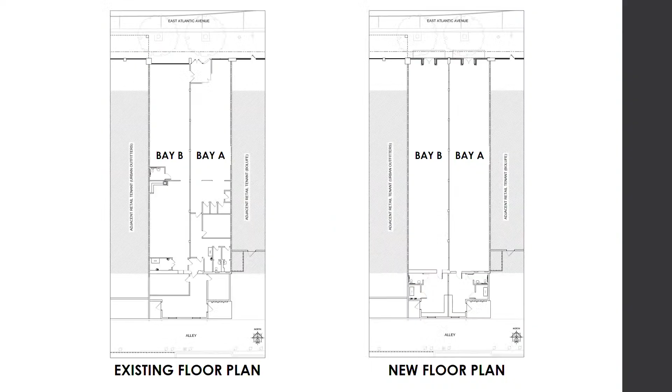On the right is our plan, which shows the new glazing that is approximately 10 foot tall to reflect a transom glass design. It's pretty much glazed all the way across. The entries are recessed, which is something we worked through with the commission and the zoning department, and we're very pleased with the way that it's turning out. We see it as a transitional type design between the two different architectural styles on either side. We think the Bolife building is more significant, so we've backed our awnings off of it and made them rather inconspicuous compared to what's there now.

And we have used some masonry on our sign band but in a much different color to tie that together. These are our finishes that we have. I would say they're understated. There's a section on the left which shows the scale of the building and the recess of the entry, and the setbacks of it.

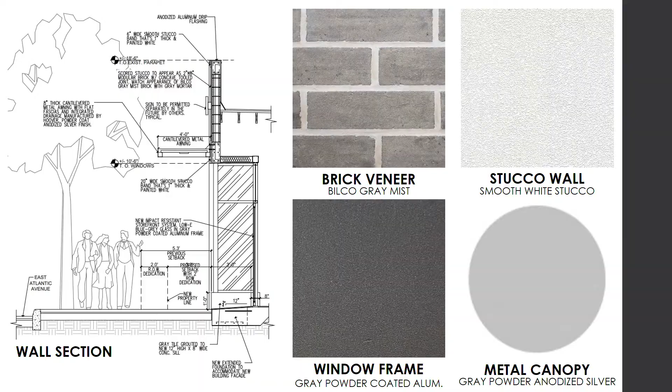And this is our rendering. It shows the completed structure there. You helping me, Susie? There we go. Thank you. So we think that it does reflect a good balance between the historic structure to our east and the contemporary structure to our west, giving nice sign locations to potential tenants there, which will be attractive to good stores. That's about it. It's fairly simple. We think it's a clean design, and we hope that you like it. If you have any questions, just let me know.

Just to note, the waiver was reviewed prior to ordinance number 3123, so the site plan will be reviewed with the regulations set forth in the new ordinance. These changes pertain solely to the processing procedures and do not alter the criteria of the approval.

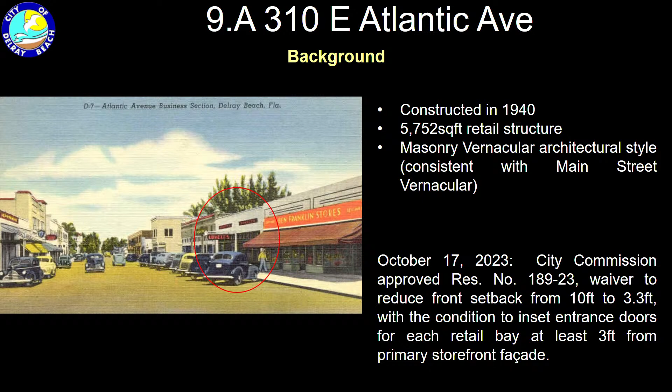On October 17th, 2023, the City Commission approved resolution number 189-23, a waiver to reduce the front setback from 10 feet to 3.3 feet, with the condition that the entrance doors were inset for each retail bay at least 3 feet from the primary storefront facade.

The request includes aligning the building facade with neighboring structures, and each bay is provided with individual doors that are inset the 3 feet.

It also includes new storefront glass, 1 foot tall gray tiles as the storefront base, smooth white stucco along the edge in the center, scored gray stucco to resemble brick for the parapet, and the parapet is lowered to its previous historic height.

It's also replacing the existing canopy with metal awning just above each bay, and the proposed style is consistent with the Main Street vernacular style. Also note the signage is not included in this review.

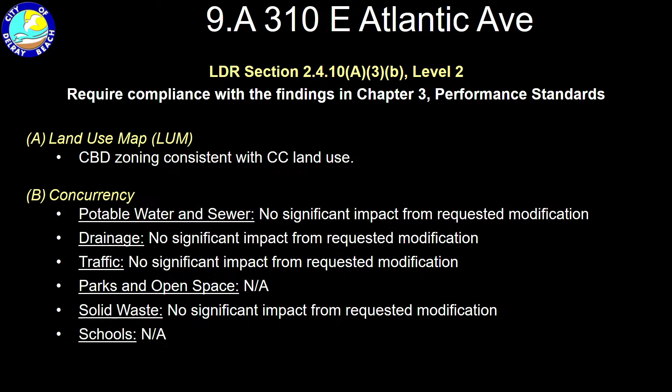Level 2 requires compliance with the performance standards in chapter 3. The zoning is consistent with the land use, and the requested modifications pose no significant impact with concurrencies. The proposed design is not anticipated to create unwarranted distractions, and the modifications of the facade are within the parameters of the CBD regulations.

In regards to the CBD regulations, the proposed height of 18 feet 6 inches after lowering the parapet does meet the required minimum of 18 feet.

The front setback of 3.3 feet has been approved by City Commission, and the proposed curb zone is 4 feet 6 inches. The pedestrian zone is 6 feet, totaling a minimum streetscape ranging between 13.8 feet to 16.8 feet, which was also reviewed during the waiver approval with the condition that the doors were inset.

The storefront frontage type standards have been met. The awning extends 0.7 feet into the public right-of-way, and a hold harmless has been attained.

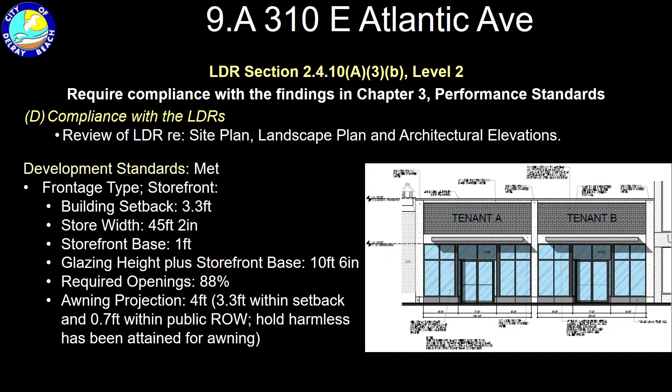The minimum requirements for architectural elevations are found in 4618A. The modifications must show proper design concepts and be appropriate with its surroundings. Also, the following criteria must be met.

The proposed modification must be in good taste and design. It should contribute to the image of the city, and the exterior design shall not materially depreciate the appearance and value of the area, and the proposal is in harmony with the overall general area.

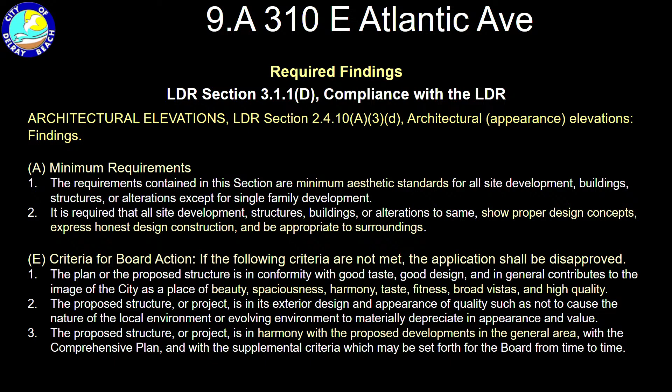The proposal incorporates many elements of Main Street vernacular architectural style outlined in the Delray Beach CBD architectural guidelines with a storefront frontage type. The parapet has been lowered in keeping with historic height, and the entrance doors are recessed to avoid any conflicts when opened onto the sidewalk.

The facade is composed of the tripartite with a base, a middle, and a top, and it meets the storefront requirements.

The proposal was reviewed by DDA in September, recommending approval, and the City Commission did approve the waivers associated with the proposal on October 17th.

These are your board motions, and this concludes my presentation. Okay, thank you so much.

Any rebuttals? Chair, public comment first. Is there anyone in the public that would like to speak on this particular item? You have 3 minutes to do so.

Okay, seeing none. Mr. Myatt, any rebuttal statements?

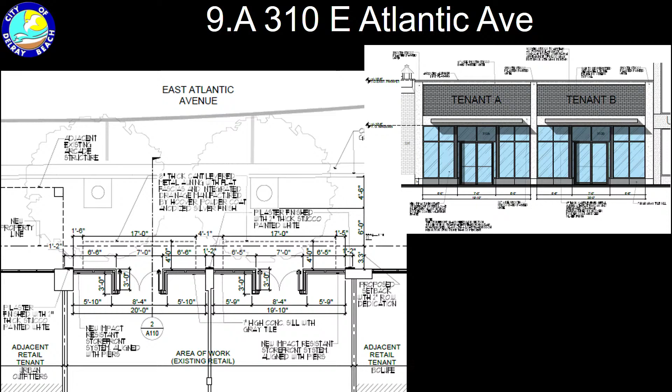I didn't maybe spend enough time on what we're taking down. I'd just like to go back to show you what's there now. It's in our presentation on the second page, I believe. It's a large projecting metal roof that's in bad repair.

Ms. Rodriguez, any rebuttal? No. Okay, great. To the board, Ms. Perdue, would you like to start for us?

Okay, yeah, I think it'll be an improvement. I'm just a little concerned it's going more towards the modern look as compared to Bolife's next door, which has a little more detail on the facade of the, let's see.

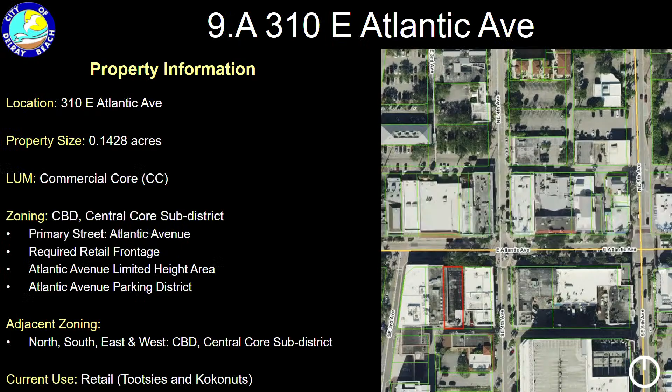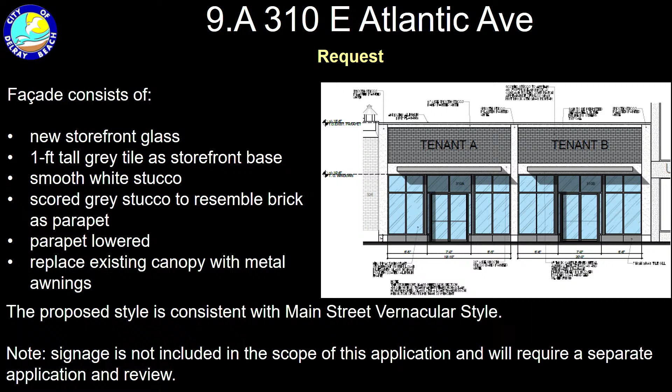Well, it doesn't show it, but at the top there's a little more architectural detail, a beautiful masonry cornice. I would like to see that, but that's personal, which has no weight or credence. I think it looks good.

But taking down the awning definitely would be a plus. We think our building will accent that because that's pretty special. Adam? I'm in agreement. I think this is going to enhance that overall section of the block, and I think you guys have taken some thought and consideration into making sure you're not encroaching on the architectural design of the building next door. I appreciate that.

Mr. Boyd? I don't have any comments. Mr. Alvarez? No comments. I agree with my counterparts. I think it's a good compromise between what's there and bridging your north and south, east and west - I'm directionally challenged - so I think it's a very good compromise in line with the area. Those are my only comments.

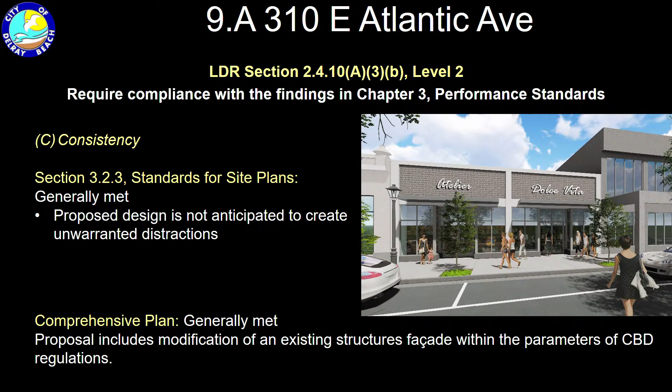Can I have a motion? You want to do it? I think staff's getting the slide up, if you can read that. I have it right here.

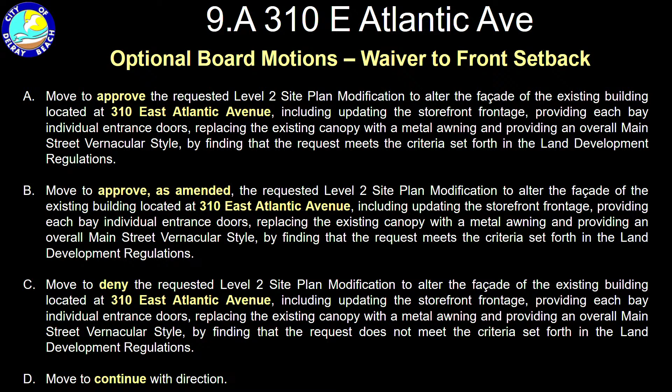Move to approve the requested Level 2 site plan modification to alter the facade of the existing building located at 310 East Atlantic Avenue, including updating the storefront frontage, providing each bay individual entrance doors, replacing the existing canopy with a metal awning, and providing an overall Main Street vernacular style, by finding that the request meets the criteria set forth in the land development regulations.

Can I have a second? Yeah, I'll second. First and a second, can you call roll, please?

Annette Gray, yes. Jose Alvarez, yes. Linda Perdue, yes. Keith Beal is absent. Stephen Cohen, yes. Dana Adler is absent. Adam Nelson, yes.

Okay, thank you, congratulations. Well, our office and the Leyland Group thanks the board and the Planning and Zoning Department. Thank you very much, great job.

9B has been modified from tonight's agenda, so that takes us to item 9C, Delray Townhomes, 2021-025. Mr. Gedanik, if you can introduce the item for us, please.

Sure, good evening, board members. Julian Gedanik, Senior Planner. I'd like to enter into the record file number 2021-025, a project known as Delray Townhomes. Once I open this presentation, I will turn it over to the applicant. In the meantime, are there any ex parte communications for this item?

No, none for me either. And before I pass it over, I just want to advise that there should be some correspondence provided in your package regarding some opposition we received via email.

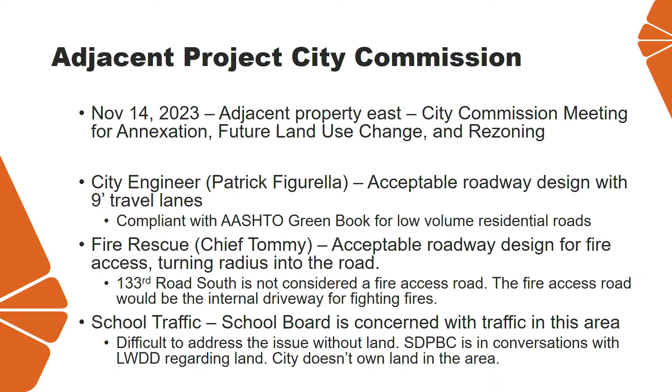There was also a comment made at that meeting about the school board finally moving forward with some traffic improvements in the area. They mentioned it's difficult to address internal circulation and stacking without additional land, but the school district and Lake Worth Drainage District are in conversations regarding obtaining additional land, to which the city doesn't have any.

Just briefly, since we've got some new board members since we were here 2 months ago: we've got 5 residential buildings, townhome style, but units for rent. Our client is gearing this development with the 25 units towards small families. They're not designated affordable housing, but the price point will target that demographic. 25 total units, just below the maximum density allowed in RM8, with 5 two-bedroom and the rest three-bedroom units, meeting the minimum square footage requirements.

We're donating the northern 25-foot portion of right-of-way for expanded right-of-way whenever the future development comes in, adding a multi-use path at the south border along the canal, and improving 133rd Road South out to Barwick Road. The project meets all development standards and criteria with no waiver or variance requests.

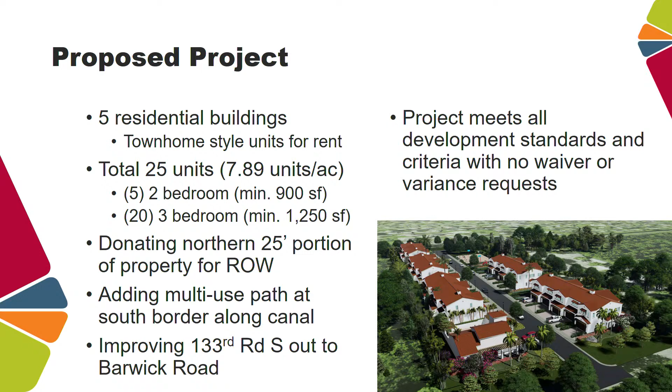For parking, we've got adequate parking for the project with 1 space in the garage, 2 spaces in the driveway, plus guest and ADA parking. We are in excess of the minimum required.

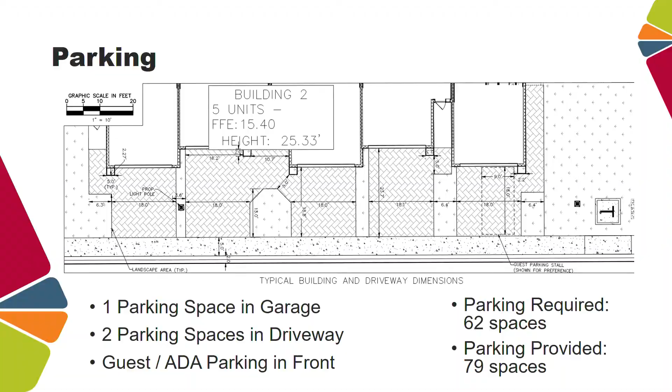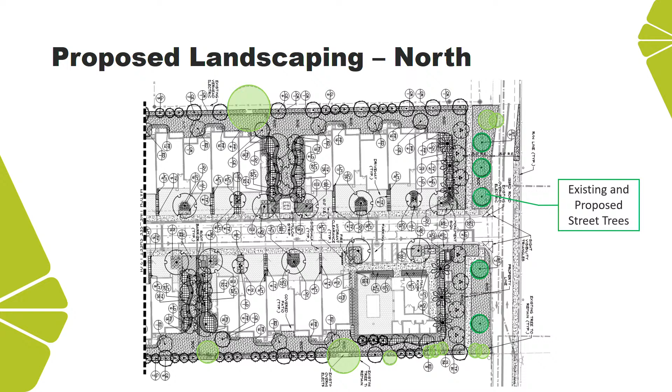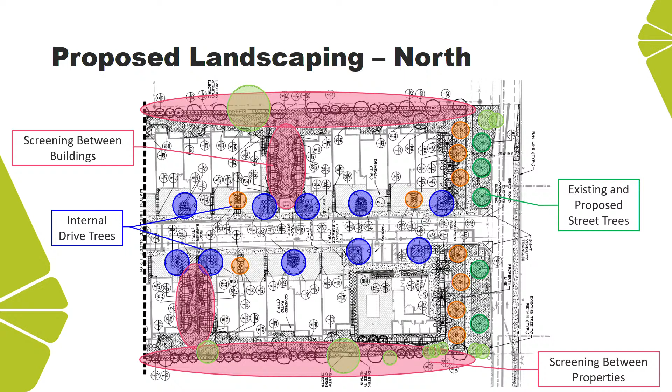Internal drive trees of a couple different species, with screening between the buildings using nice landscape alcoves, and screening along the perimeters between properties. Similarly along the south, internal drive trees, with all the light green trees maintained, especially the one between the tot lot and the residential buildings. Those are some nice mature trees.

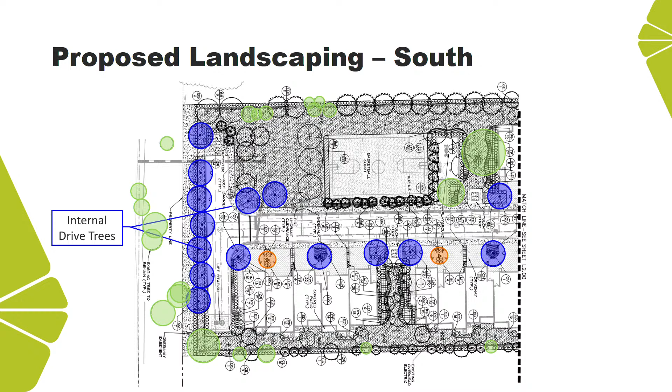Landscaping around the amenities, screening between the buildings similarly, and between the adjacent properties.

One thing of note, the 133rd Road South improvements that we worked with the city engineer and DSMG on for approval: we've got new sidewalks shown all the way out to Barwick Road that our client is responsible for. Depending on timing with the adjacent property to the east, we may do some cost sharing, but this is part of our approval that we need to make these construction improvements for the right-of-way.

So sidewalk along the north right-of-way line goes all the way out to Barwick. The south side of our frontage will be in the location that the ultimate right-of-way will be in the future. This area, we do have the full 50-foot right-of-way, so that can be designed and will ultimately connect into the roadway when there's more development to the east, that east property, and going further out to Barwick.

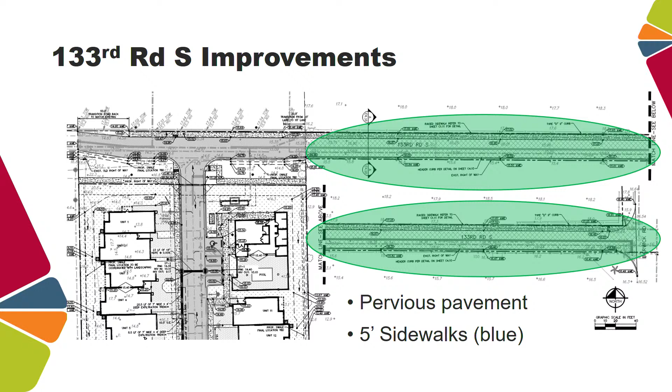We do have 10-foot wide lanes in that area, and they narrow down to 9-foot lanes for the remainder in this green area, just because there's only a 25-foot right-of-way. It's the maximum amount of width of roadway and sidewalk with existing utilities. It's also going to be pervious pavement. We don't have room in there to put closed drainage or an outfall, so it's going to be pervious pavement, so an improvement from a drainage perspective there.

Just noting the updated traffic analysis. This project does generate minimal traffic. The 25 units, using the accepted methodology by the county and the city, generates AM peak hour trips of 2 trips in and 8 trips out. PM peak hour is 8 trips in and 5 trips out. So, pretty small traffic generation.

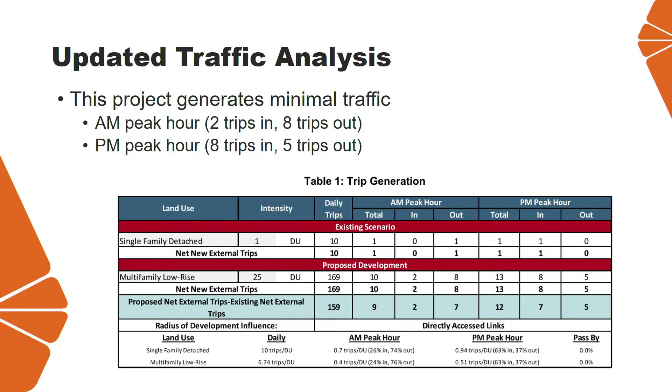This is actually considered an insignificant impact to the roadway networks.

We also heard your feedback and put in our traffic study, submitted to the county and the city, a time of day distribution looking at those 2 hours worth of pickup time from 1 to 3 p.m. when it's the worst in that area. The anticipated number of trips for this property generated during those times is 7 trips from 1 to 2 and 9 trips from 2 to 3 p.m. So that's a car about every 7 to 8 minutes during that time frame. Again, not a significant traffic generator. This project isn't going to exacerbate those problems further.

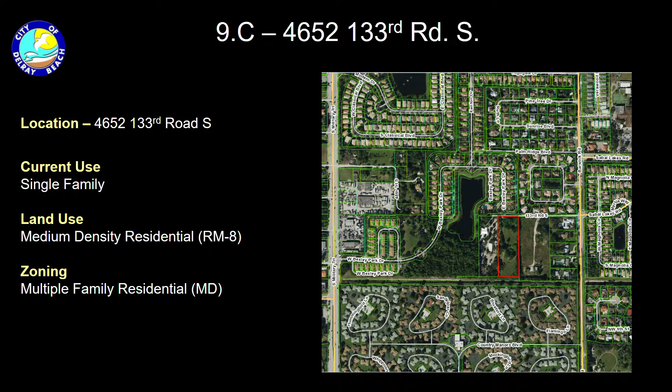This is an aerial view of the subject property to have an idea of the context. The property that was recently the subject of an annexation is to the east, to the west is single family, and then you have intermixing of single family and multifamily around the larger area.

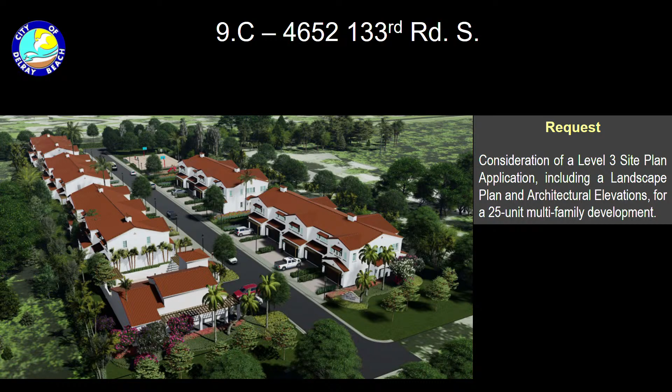So the request before you today is a Level 3 site plan application, including a landscape plan and architectural elevations for a 25-unit multifamily development, shown in a townhouse typology, but these are, again, for rent, as the applicant clarified.

There is also an annexation and land use map amendment for the adjacent property that has been approved, and the zoning district of that adjacent property is still going through the process to determine what that will be. But that is a completely separate application, a different applicant, different property owner. It's not really related to this specific request, but I wanted to provide that background.

As most of you are aware, this application was previously considered by SPRAB on September 27th. At that meeting, as the applicant has gone over, there was a request and direction from the board to provide an updated traffic analysis and traffic approval letter from Palm Beach County, which they have since done.

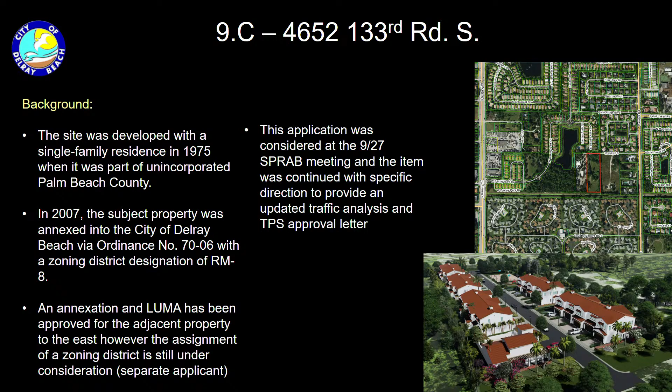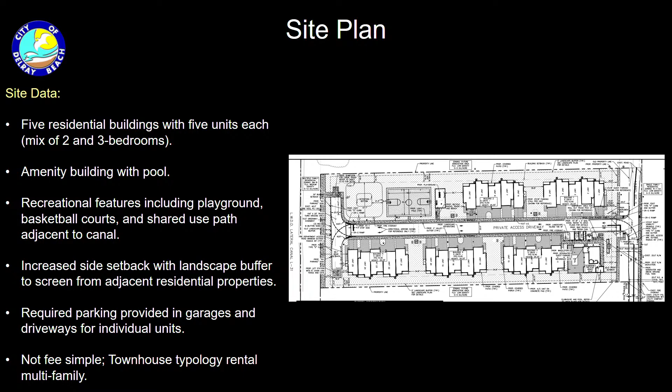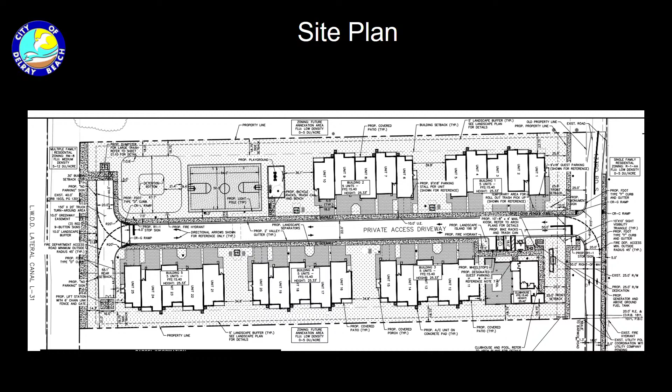This is just a blow up of the site plan. You can see each individual building comprises 5 units. They're spaced out according to the requirements of code. This site meets the requirements in terms of building footprint and lot coverage, as well as exceeding the requirements of open space.

Moving towards the street improvements, as the applicant referenced, they will be required to dedicate 25 feet of right-of-way. So the portion of right-of-way in front of their subject property will go from 25 feet, which is currently existing, to a total of 50 feet. They will be improving the road as is typically required for a width of that size, and they will also be required to improve the rest of 133rd Road South to the engineering standards as approved by DSMG, which is the Development Services Management Group.

That's a collection of different directors and other positions in the city that decide on matters relevant to things such as right-of-way improvements. That was decided in 2021 in terms of the 9-foot travel lane width. Travel lanes will be 10 feet in front of the subject property, but where the limited right-of-way exists, they will provide 9 feet, as well as 2 feet of drainage and a 5-foot wide sidewalk. It is important to note that currently there is no sidewalk on this street, so they will be providing full pedestrian connectivity from their development all the way to Barwick Road.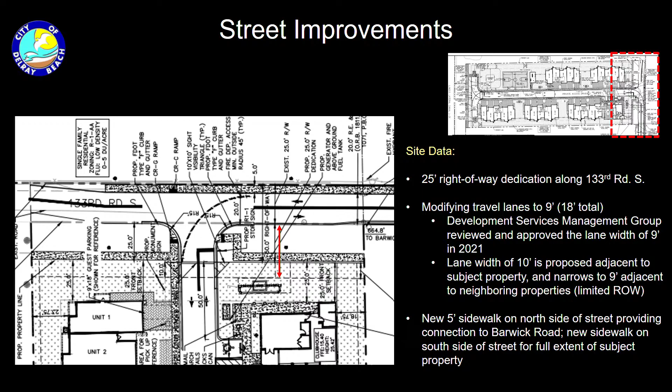With regard to the design, they are proposing a Mediterranean revival architectural style, which is customarily appropriate for this region and is one of the accepted design styles in the city of Delray Beach. This isn't in the CBD, so it's not necessarily subject to those regulations, but this is one of the styles that has been deemed appropriate. There are elements of the style that are appropriate and true to that architectural category.

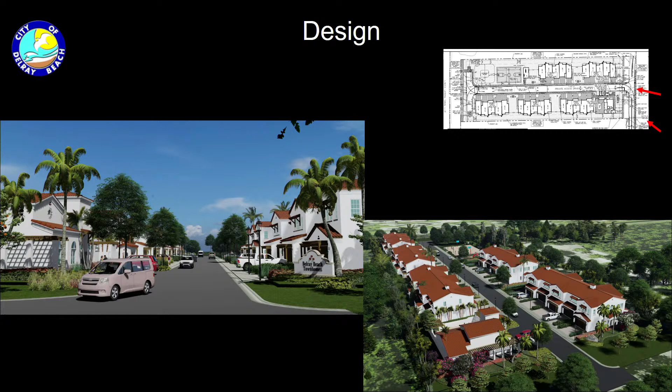They're utilizing smooth white stucco, and then contrast is introduced through warmer tone elements like the tile roofing and then the accents around the windows. Overall, there's subtle ornamentation and architectural treatment throughout the facades, which is appropriate for the style as well.

This is looking at the elevations. You can see the residential buildings and then the clubhouse building, which is to the left. I also want to point out that our code requires that there are shifts and recesses in the massing of townhouse units so that they're not all a flat facade. So they do comply with that. With every 2 or 3 units, there is a shift, so that creates movement across the facades.

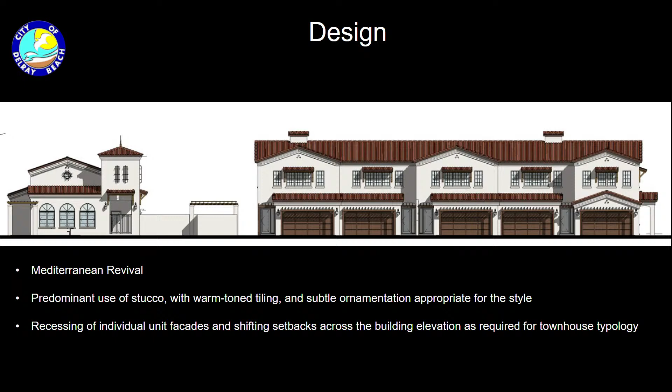These are your required findings criteria. So 4618 is your criteria for design. Generally, you need to determine if it is in compliance with and conformity with good taste, good design, and in general contributes to the image of the city, et cetera. This was fully detailed in the staff report in terms of that analysis.

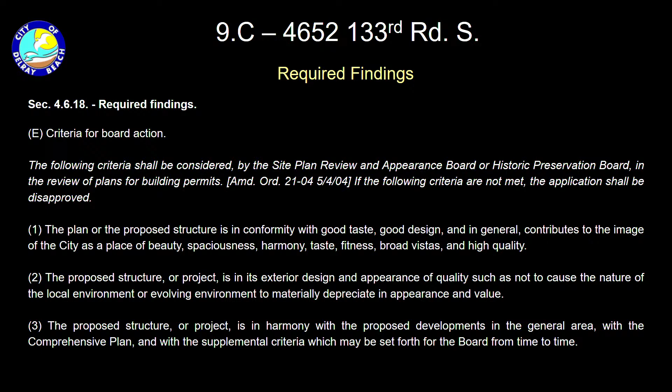And then for site plans in general, there is the criteria in section 3.1.1, which is consistency with the land use map. This project is consistent with the land use map as well as the existing zoning district.

Concurrency review, the concurrency analysis was also detailed in the staff report. It's been updated to reflect the revised traffic analysis that was provided by the applicant. In general, the traffic that will be generated by this trip is insignificant and it will not materially affect the existing roadway network.

And then there's other analysis as well in terms of parks and open space. They will be required to pay a $500 park impact fee per unit, which is required for all residential development in the city. And then C, consistency with the comprehensive plan. This project, in staff's opinion, does generally comply with the requirements and applicable goals and policies of the comprehensive plan.

And then lastly, compliance with the LDRs. No waivers or relief are sought. This does comply with all applicable land development regulations.

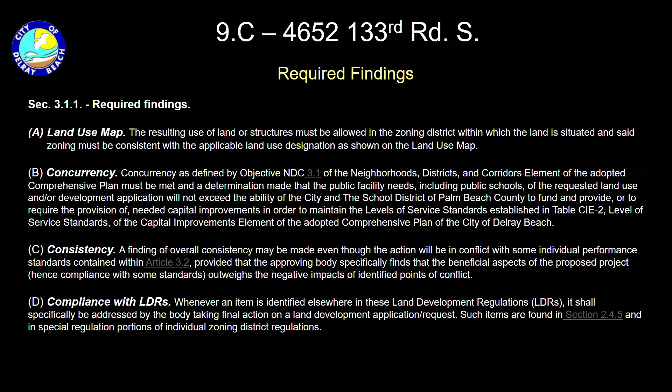Moving on, your board options tonight are to move approval. You can move approval as amended. You can move denial, or if you so choose, you can continue with further direction and more feedback. I'm happy to answer any questions.

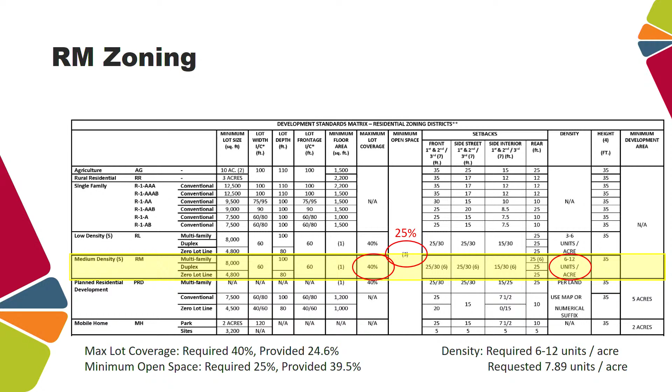A couple of code items, as mentioned: we exceed the code requirements. We're significantly less than the maximum lot coverage of buildings, and significantly higher on the minimum open space required. So a couple of performance standards, yet again, just rehashing that.

Traffic circulation—don't really want to read this over to you all, I think you're generally familiar with these performance standards, but wanted to make note of traffic improvements. We are making significant improvements to 133rd Road South. The short length of the internal driveway limits speeds to 20 miles per hour within the development, as approved by the city engineer during the TAC review. And as mentioned, we do have an insignificant impact.

Everyone, no matter what the project is, people always have an issue with traffic when there's new development. Ours has been proven by county standards to be insignificant.

Buildings are placed through the development in a manner that reduces overall massing and provides a feeling of open space. There are 5 separate buildings and a 1-story clubhouse, with different heights among those buildings. They're spaced greater than or equal to the minimum required separation by the LDRs, and the open space is significantly higher, about 40% as opposed to the 25% required.

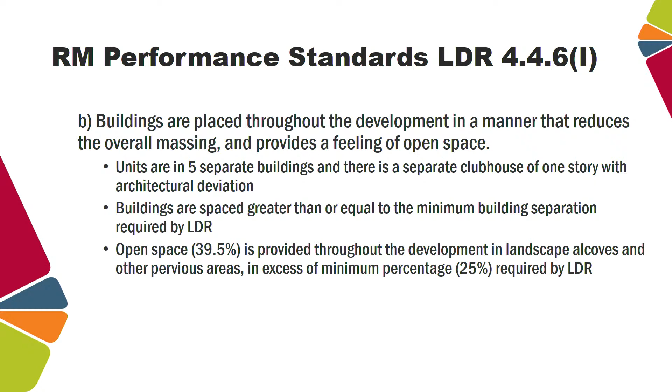When we're adjacent to districts or zoning of properties with lesser intensity, we have to increase the building setbacks and provide more perimeter trees. So we increased the setbacks of the buildings from the property line by the 25% required. We've got silver buttonwood trees at 1 per 30, and areca palms separating those as well, plus a continuous hedge to screen those lesser-intensity properties. So we've met all of the criteria there.

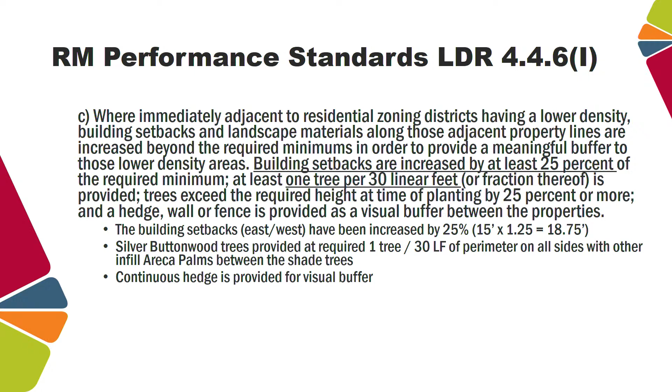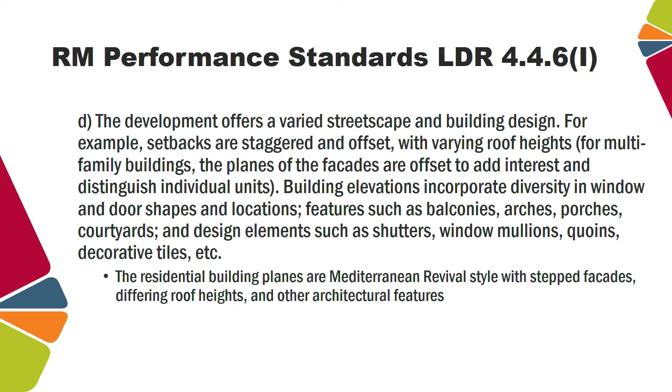Varying streetscape design, building design, and staggered setbacks, as Julia mentioned. The facades need to be offset for a multifamily residential development of this type. I think he did a great job commenting on the architectural style, and we have more detailed floor plans, elevations, and renderings if you'd like to see those, with subtle detailing of different window treatments and other things, plus a number of different unit types.

Can I just interrupt you to say, not necessarily the entire proposal over again, is there any particular points that you just want to wrap up with?

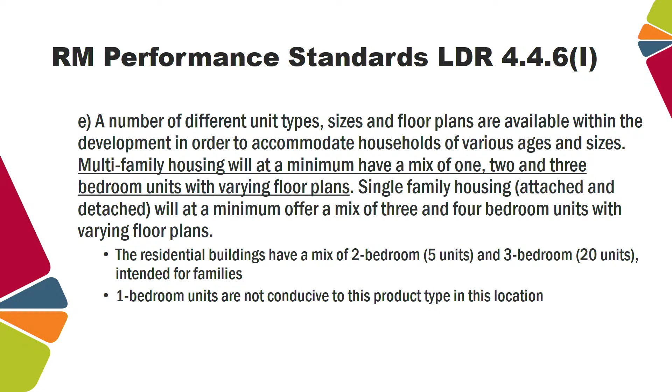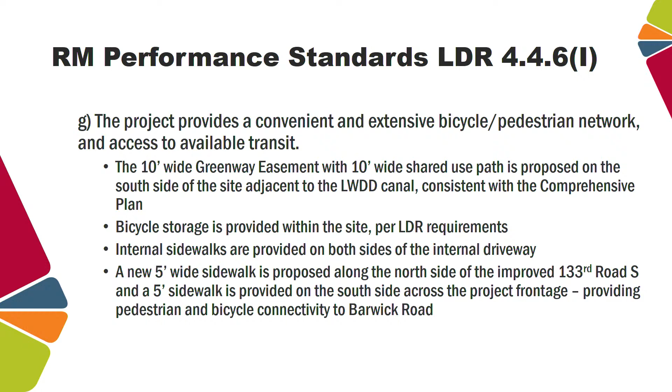Sure, absolutely. The big point of all this is, of all the performance standards, it's our opinion that we meet them. It's actually also staff's opinion that we meet the requirements of the performance standards. We meet all the performance standards. Staff agreed to that. We worked heavily with staff over the last 3 years on this project to ensure that it met the development standards.

And then just a couple of comments from some of the board members last time: a well thought out development, they really liked the project. They commented on doing a nice job with the amount of space available, getting a lot of interesting things in there, but not too much that it looks crowded. The landscape looks great - what you can do when you're not trying to cram 10 pounds into a 5-pound bag.

So I do want to rebut some of the statements made in the letter also that you received, which were pertinent to these items. And then Adam, if there's any specific items on traffic to rebut as well. Thank you.

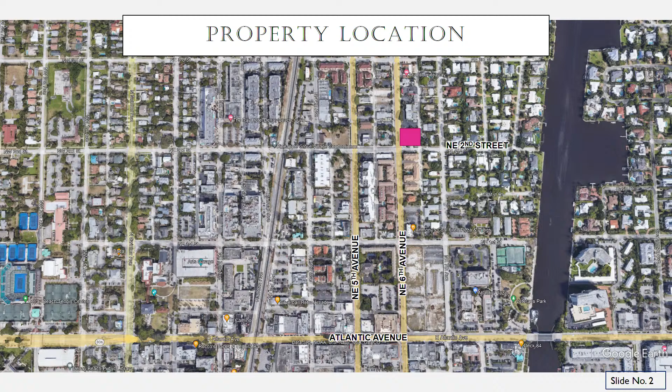So just to orient you, the property is highlighted in that pink box, located at the northeast corner of Northeast 6th Avenue and Northeast 2nd Street, about two blocks north of Atlantic Avenue. Here is a close-up aerial of the property. It's 0.39 acres. Again, you can see the location across from Northeast 6th Avenue.

You have the cigar bar. To the south, there's the Renaissance Village Apartments. To the east, there are some townhomes that are fairly recently constructed, and as you go further east, there's a single-family home community.

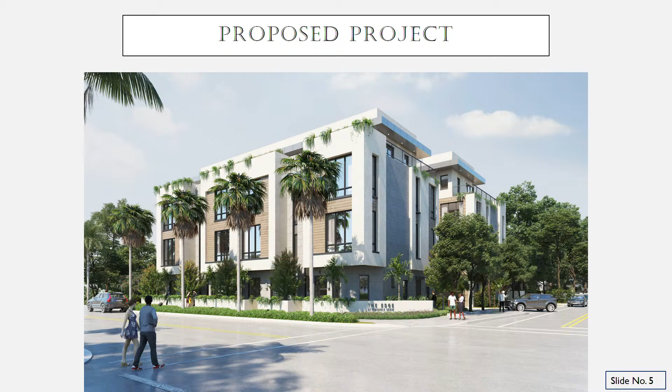This is a graphic showing the proposed project, and we're going to get into some details as it relates to the two waiver requests. Essentially, it is an 8-unit townhouse project. We are on two primary streets, 6th Avenue and 2nd Street, so we have the required frontages for those primary streets, being the stoop frontage type. The building is set in a little at the corner on the first floor. It is three stories, with the fourth floor having a bonus room and an amenity deck, so there's outdoor living space there as well.

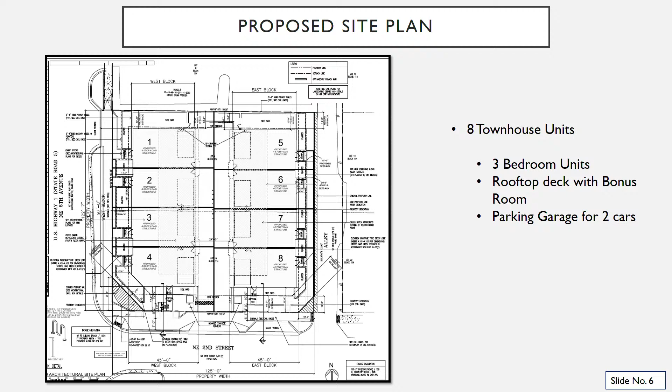Here is our proposed site plan. We'll walk you through the waivers in more detail, and unfortunately, with it being black and white, it's a little hard to read, but essentially there are 4 units that will front Federal Highway 6th Avenue, and 4 units that front the alley to the east. We have a central driveway located in the middle that will serve the parking garages attached to each unit. Each parking garage has room to fit 2 cars, so that's primarily how the project will be parked, and there is also some on-street parking that we were able to accommodate.

So again, we're here before you for 2 separate waiver requests. The first is from LDR section 4.4.13C to reduce the front setback at the corner, at Northeast 6th Avenue and Northeast 2nd Street, from 10 feet to 3.5 feet for the 2nd and 3rd floors only, not the 1st floor. The second is from LDR section 4.4.13 I3BI to permit vehicular access to the property from Northeast 2nd Street, which is a primary street. We're going to go into those now in a little bit more detail.

Starting with the corner setback waiver. The request is really due to a corner dedication at the intersection. The property right now is essentially a box. We are meeting the setback requirements on Northeast 6th Avenue, and on Northeast 2nd Street. At the corner, there is now a dedication required, so there's a taking and the property line is shifting. At that corner only, the property line goes further in, so we are requesting a waiver from that setback, again at that corner location only, and only for the 2nd and 3rd stories.

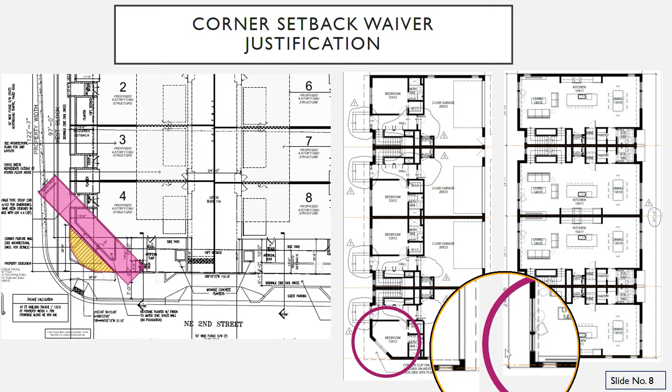So you can see, here we have the 1st floor. You can see that the building is clipped at that corner so that we meet the setback. Then going to the 2nd and 3rd stories, we are proposing to keep that box. Really that's to create some visual interest to the property.

With the ground floor meeting the required setbacks, the pedestrian experience will not be affected. The upper story encroachment overhangs the landscape area and emphasizes and accents the corner of the intersection. The hardscape at that corner runs adjacent to the landscape area, so you won't have any pedestrians walking below the overhang portion of the building. The proposed streetscape does meet the requirements of the LDRs. We have that 6-foot, 6-inch pedestrian clear zone at that corner with an 8-foot curb zone that's required.

So we are still meeting all of the different pedestrian streetscape requirements. We are exceeding the minimum requirements and meeting the intent of the code and the intent of the setback provisions there still. The waiver will not diminish the pedestrian experience or the connectivity of the street and sidewalk networks.

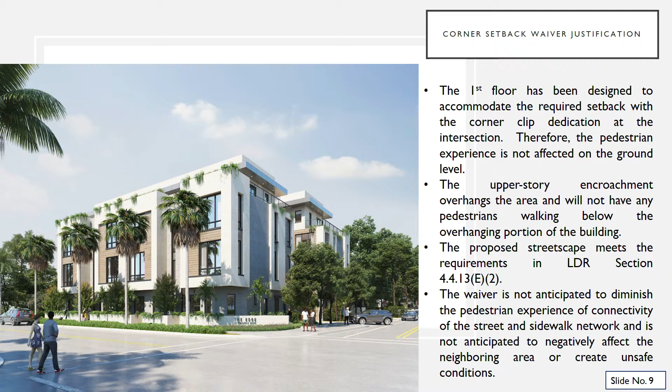This goes to the criteria for the waiver justification. These are also items that staff has noted in their staff report. It's also noted that it will not negatively impact the neighboring area or create an unsafe situation. Again, we're still accounting for all of the pedestrian areas that are required to ensure pedestrians can not only travel safely along Federal Highway, it is a busy intersection, but also have an attractive and nice pedestrian experience. Finally, as noted in the staff report, other projects with similar circumstances with the corner clip dedication have been granted similar waiver requests in the past.

Primary streets are intended to develop over time as superior pedestrian environments and are held to a higher standard as it relates to building placement, building frontages, the location of parking, and the location of service uses. So we are not proposing to diminish that. We are still focused on building placement, having those pedestrian zones, the enhanced landscaping. The doors fronting Northeast 2nd Street have a stoop frontage type in adherence to these requirements.

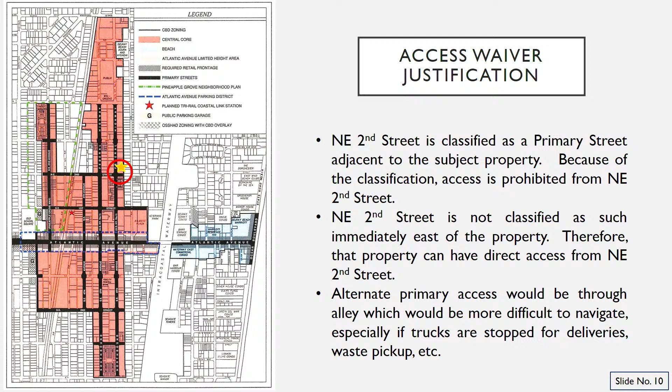One more point here. Again, the primary street ends at the subject property and does not carry forward. So rather than a standard concrete sidewalk, we are proposing attractive pavers that will run along both primary streets. Because of the delineation change in the pavers at the driveway, there's a change in the paver type. They have a crisscross pattern here as opposed to the straight line pattern where the pedestrian crossings are, which will help delineate the vehicular use areas from the pedestrian areas.

Again, along Northeast 2nd Street, we do have separate side entrances to the units to activate the streets. So there's an entrance in this area, and then on this building here as well.

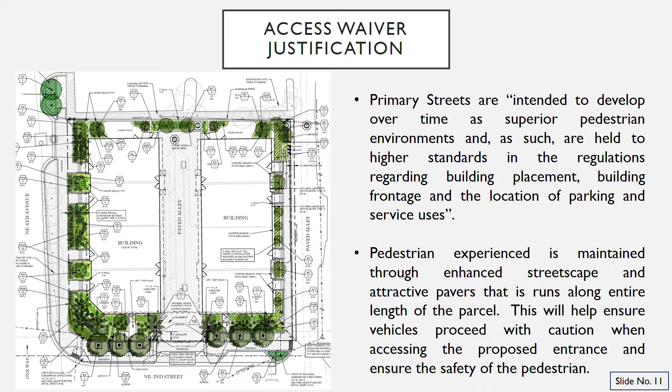The Renaissance Village project across the street does not even activate the primary street frontage. They were developed prior to those code provisions taking effect, but they have a large expansive blank wall along Northeast 2nd Street and a fair amount of off-street parking.

We're not trying to get away from the pedestrian experience enhancement requirements. We feel we're exceeding the landscaping and providing an attractive experience. We worked closely with city staff on this street frontage to ensure pedestrians have a safe path, with no conflicts with utilities and the placement of street trees and other required trees. We really have worked to achieve the intent of the provision.

Per the staff report, the request is not anticipated to diminish the pedestrian experience or the connectivity of the streets or sidewalk network. The request is compatible with nearby developments and is not anticipated to negatively affect neighboring areas or create unsafe conditions. At this point, I'll pass this over to our architect and design team, Nick Netta, to run through the next couple slides.

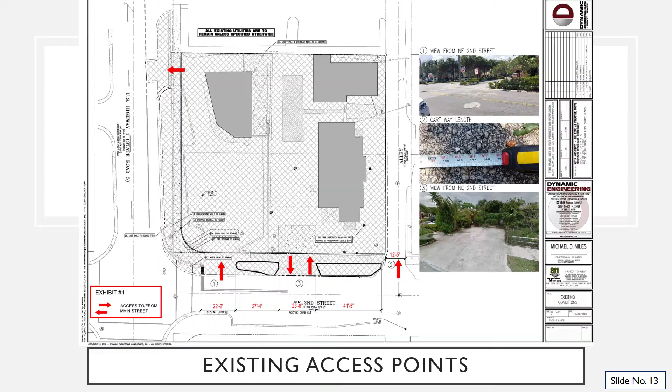This shows, as Christina mentioned, the existing site setup. We're proposing one centralized entrance driveway. We felt this worked better for circulation for the project, so we centralized the access point into the driveway and reduced the accesses off Northeast 2nd from 2 down to 1.

We developed the stacking condition at the corner where we could stack between 2 or 3 vehicles, where presently there's no stacking that exists. We've also activated the street front with 2 additional visitor spaces and/or a delivery space for deliveries coming into the development.

Touching on parking, per the Palm Beach County table of trip generation, the existing site on Federal generates 10 trips per hour for the retail, plus the other 2 residential components, each generating 1 trip. So you're looking at a total of 12 trips per peak hour. We're reducing that down to 4, roughly 1 car every 15 minutes coming in and out of the site.

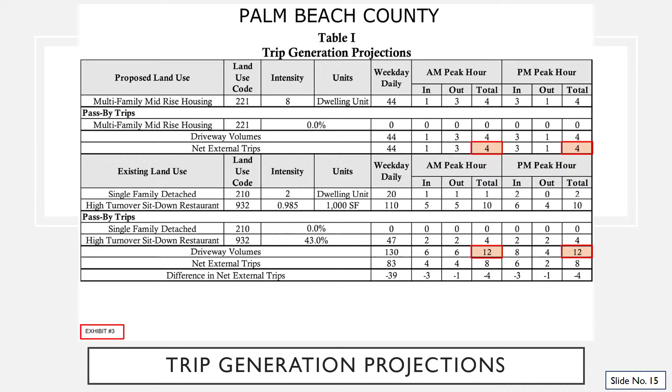According to the tables, it'll be 1 in and 3 out. Lastly, we were here in April with the project, and we had some concerns about the activation or pedestrian experience along Northeast 2nd from the Palm Trail group. We had 3 meetings with Palm Trail to try to work through it, and as a result we removed the site walls from the side yard and activated Northeast 2nd with landscape berms as they requested, to increase the pedestrian experience.

We worked closely with the city. It triggered 2 additional review periods. We had to activate the northeast elevation, the Northeast 2nd elevation, now as a main entranceway, so we had to bring entrances off of that and do some minor redesign to the project. But this was the culmination of those meetings and the activating of the pedestrian experience there.

Christina: Thank you. So just to Nick's point, obviously we were here in April. We have not just been sitting on our hands until now waiting to come back to you. We were hoping to be in front of you a lot more quickly than we were.

But obviously at the last meeting, there were some residents that came out. It was the first we had heard of any neighbor concerns. So we wanted to ensure that we sat down with those who were concerned and listened to their concerns and understood them.

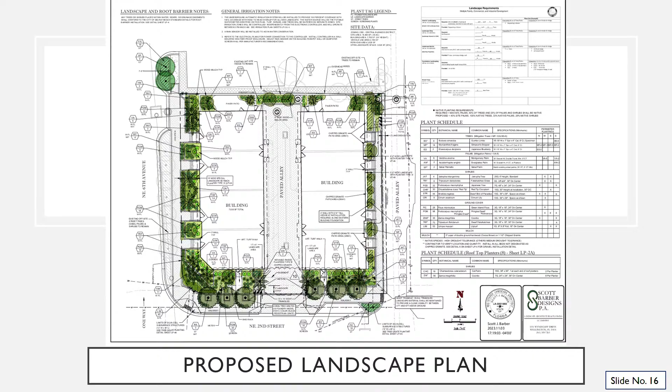Just briefly to run through the different criteria - staff detailed this in their report as well, so all the documentation is there. The waiver shall not result in an inferior pedestrian experience along a primary street, such as exposing parking garages or large expanses of blank walls. Again, we've taken out the wall that was proposed along 2nd Street, so we meet that criteria.

The waiver shall not allow for the creation of significant incompatibilities with nearby buildings or uses of land. We're compatible with what's around us, including across the street with the Renaissance Villages. Related to access, Renaissance Villages has access off the alley, but they also have their primary access off Federal Highway, which is what you see in most situations with properties in the area that have access off the alley - it's a secondary access, and they still have another means to access the property.

The waiver shall not erode the connectivity of the streets and sidewalk networks or negatively impact the adopted bicycle and pedestrian master plan. We're not eroding that - we meet all of the curb zones, pedestrian zones, and have landscaping to enhance that as well. The waiver shall not reduce the quality of civic open space provided.

This project does not meet the requirement for civic open space. It's not needed for this project due to the size.

All right, just a few notes. You should have received some public comments if that's been passed out. Also note the code sections referenced in the staff report - for Chapter 2, it reflects prior to Ordinance 3123.

So the property is zoned CBD in the Central Core Subdistrict, and this proposed use is for an 8-unit townhouse development, and this fronts two primary streets, Northeast 6th Avenue and Northeast 2nd Street.

The waiver requests to the CBD requirements include the relief to allow vehicular access from that primary street and to reduce the front setback requirement from 10 feet to 3 feet 6 inches for the second and third floors only, at the corner of Northeast 6th Ave and Northeast 2nd Street.

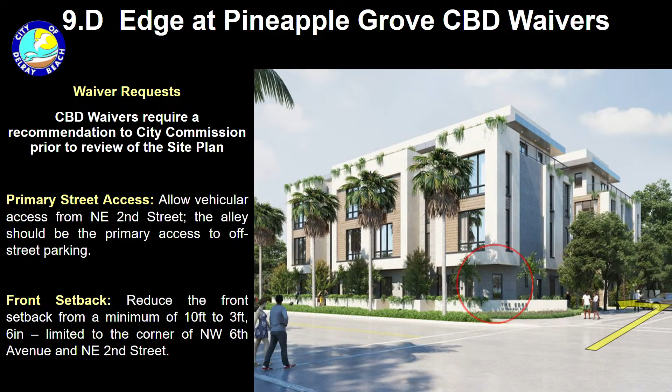The first waiver request is for relief of LDR section 4413I3B1. If a primary street is present, vehicular access to off-street parking must primarily come from alleys or secondary streets. The proposed project corners two primary streets and sides an alley adjacent to the multifamily residence. Pursuant to the CBD requirement, they should actually be getting the access from the alley for vehicular access. The proposed project is requesting to allow the vehicular access to come from Northeast 2nd Street.

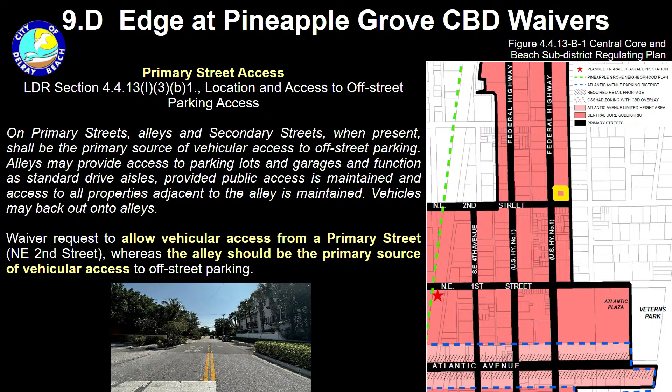Also, the waiver request should not affect the neighboring area, create any unsafe situation, or result in the grant of a special privilege.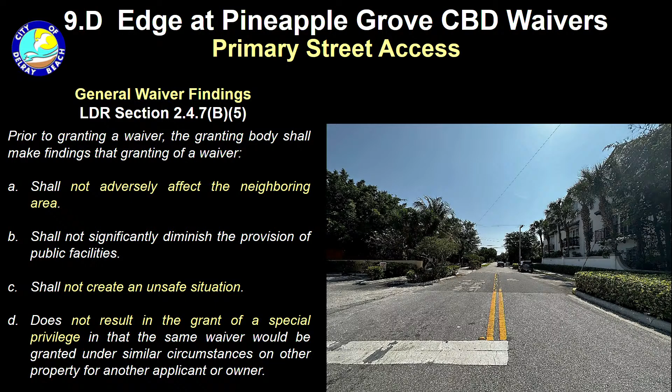Overall, the request for primary street access is not anticipated to diminish the pedestrian experience, especially since the sidewalk paver type and pattern continues through the access to ensure that the pedestrian experience is not only continuous, but also safer. It's also compatible with the nearby developments - for example, the townhouses to the east also have access from Northeast 2nd Street. It is also not anticipated to negatively affect the area or create unsafe conditions.

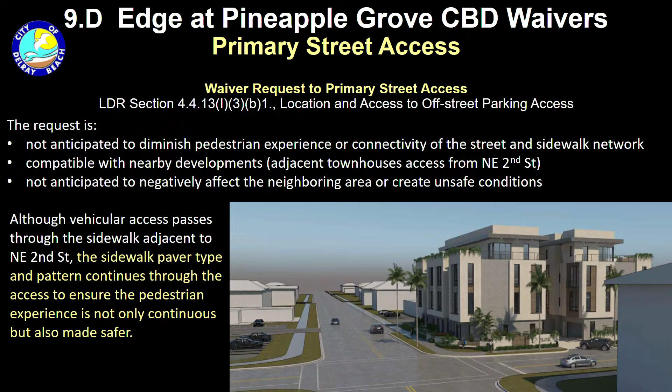The second waiver is relief to LDR section 4413D2A1, which requires that the property, located in the Central Core Subdistrict, must have a front setback of 10 feet. The proposed project is requesting to reduce that to 3 feet and 6 inches.

The setback reduction is only for the second and third floor. The first floor will meet the CBD requirements. It's also good to note that the project did dedicate a 20-foot radius at the intersection of Northeast 2nd Street and Northeast 6th Ave, so that did push their property line in.

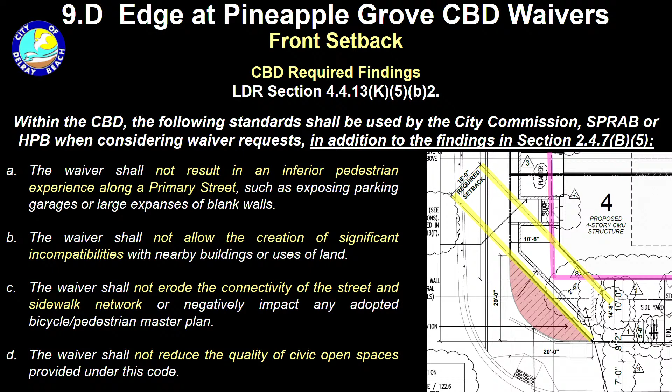These again are the CBD required findings, and these are your general required findings. Another item to consider for this waiver request is to ensure that the setback reduction does not result in a streetscape that does not meet the minimum requirements, and the proposed project meets the streetscape requirements.

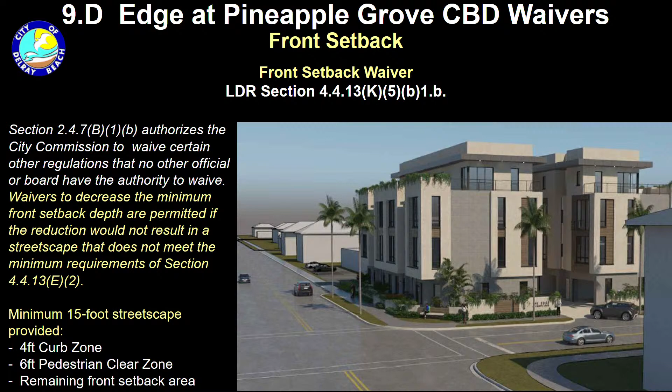Overall, the request to reduce the front setback is not anticipated to diminish the pedestrian experience or negatively affect the neighboring area. It is not anticipated to create an unsafe situation and also responds to architectural concerns. The proposed style of masonry modern typically has concepts of a solid mass with carved spaces to create entries and terraces, and these types of carved spaces can lead to deep overhangs that can provide shade at a pedestrian level.

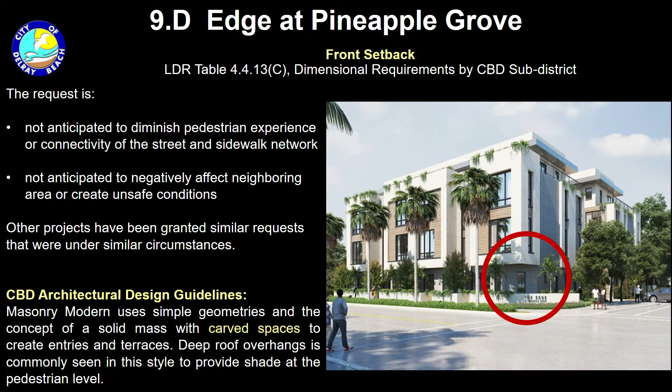So these waiver requests were previously reviewed by SPRAB on April 12th of 2023. And after the deferral, the applicant has met with the residents to address their concerns. And as a result, the project has been revised to remove that privacy wall that was shown to you, and along Northeast 2nd, as a primary street, it is held to a higher standard.

So the overall pedestrian experience, as stated before, is continuous, and that actual pedestrian zone is ranging from 6 feet 1 inch to 7 feet.

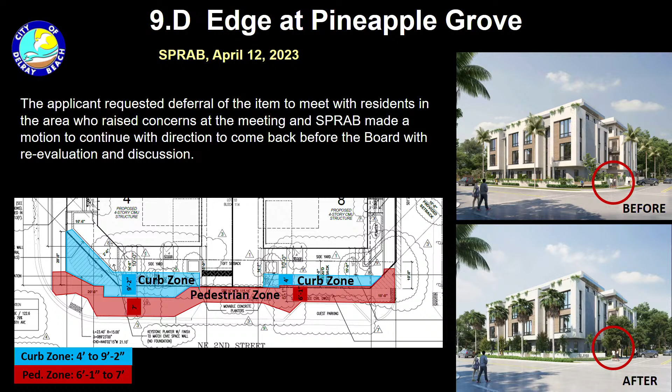The proposed project, including the requested waivers, have been reviewed by DDA, and the DDA board supported the waiver requests. And the following slides are the board options. This will conclude my presentation.

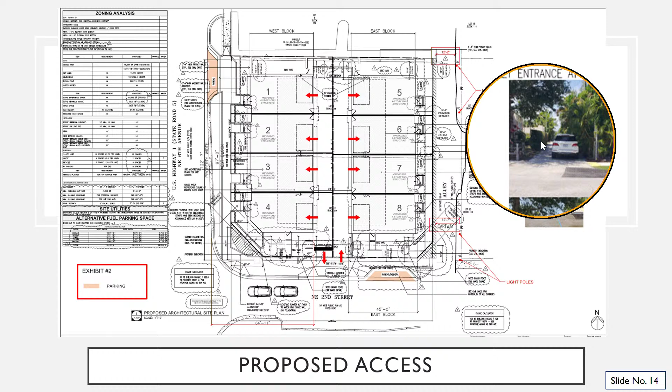How do I go to the next slide, the next picture? So zoom in on the photographs. So this is the depiction of the alleyway. This is my truck pulled hard against the vegetation of the development next to us. There's 4 foot between my car and the cartway. It is impossible for a normal driver to drive down this access way. If a vehicle breaks down, the whole development would be closed until the vehicle is moved.

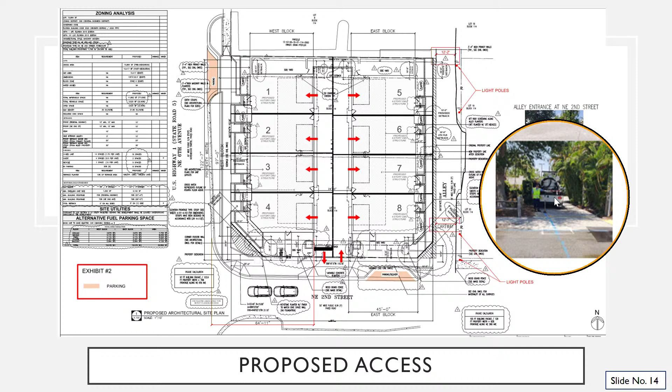Secondly, this alley is also serviced by Delray Water. Here is the truck parked. It takes the entire alley. How can people living in a development access it? It's an undersized alley. Furthermore, we ran a traffic analysis of the turning radius of fire apparatus, and emergency vehicles cannot get into the alley. There's existing light poles which minimize that.

We can go to the turning radiuses. They're at the end of the presentation. You cannot get emergency vehicles down this alley without jockeying them around. And in the case of an emergency, time is of the essence. These vehicles cannot access this alley.

Secondly, or lastly, alley systems traditionally throughout the United States, when they're incorporated into any planning of any town, are used specifically for associated uses, not as major vehicular access points. They're used for trash, they're used for deliveries. They are never used as a singular point of access to a development.

Federal Highway is a state road controlled by FDOT. We did try to secure access off Federal Highway, and that was denied. We then showed FDOT the proposed plan with access off Northeast 2nd Street, and they reviewed it for safety and potential impacts. We have an FDOT approval letter for our access point setback, about 40 feet from the property line, which is part of the city's file. FDOT has confirmed this access is acceptable from a safety standard, and I'm happy to answer any questions.

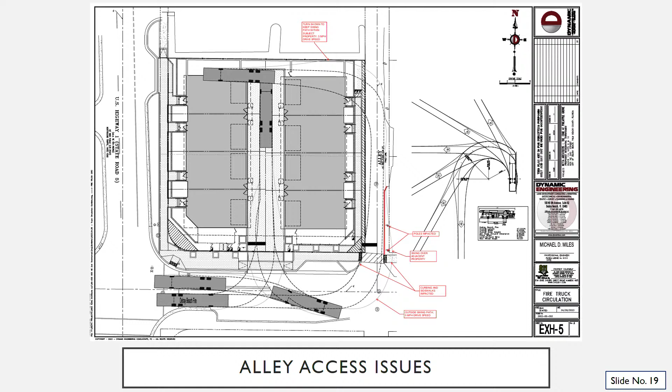Thank you. Are we able to rebut the rebuttal, which contained inaccurate information?

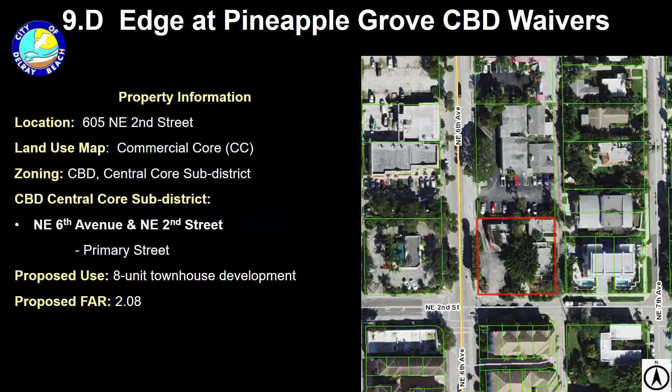Generally speaking, the way the process works, after public comment, the applicant and staff are presented the opportunity to present rebuttal evidence. The next step after that would be board discussion. It's up to the board whether they decide to reopen public comment, but generally speaking, that's not something the board considers doing.

I'd also like to note that our technical advisory committee did review the site plan. The site plan is still currently being reviewed. This is only for the waivers, but fire and police are included in the technical advisory committee, and based on the last resubmittal, there were no comments from fire and police. However, when there is a resubmittal and any revisions, comments may come, but that is to note.

The property is also dedicating 2 feet of right-of-way for the alley, and the property adjacent to the east also has a 2-foot dedication. So up until this point it is 20 feet, then it goes back to 18 feet, then back to 16 feet. So it will narrow the alley back, as it only has the dedication up to a certain point.

Okay. Mr. Alvarez? You again? Yes. Sorry.

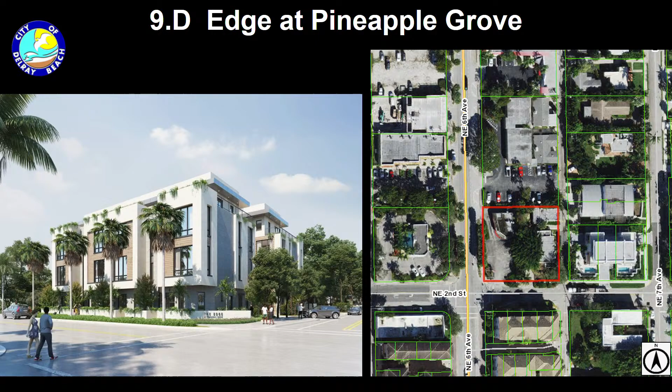So in terms of the access waiver, I'm a little conflicted, in the sense that it's moving the access way onto a primary street. But I look at the development to the south, and they're accessing directly onto Federal Highway, which to me seems like a better alternative. At the same time, yes, it's not ideal to have traffic crossing the sidewalk, but I also look at the scale of the development, it's 8 units, and I forget the exact trip numbers, but it seemed pretty nominal in terms of the amount of trips crossing that sidewalk in a given day. So I'm a little on the fence. Does moving the access 40 feet to the east really make that big an impact? I'm not certain, you're still going to have the same amount of traffic, just 40 feet east. So I guess I'm on the fence on that one.

Ms. Prudo? I'm more concerned with the alley situation than the new cut for the new driveway into the project. I don't think it's conducive to the neighborhood to have that as a major traffic area, which it would be if that was the front door for the, I'm not sure what, the easternmost building I guess. The other concern I have with the waiver, and waivers in general, is whether if we give the waiver for the setback on the first floor, the waiver stays with the property, not the design of the building, right? No, the waiver would be project specific, variances are the ones that run with the land. Oh okay, thanks for clearing that up. Yeah, I mean, to me the building's too massive, but the waiver itself has nothing to do with that, so I don't have a problem with it.